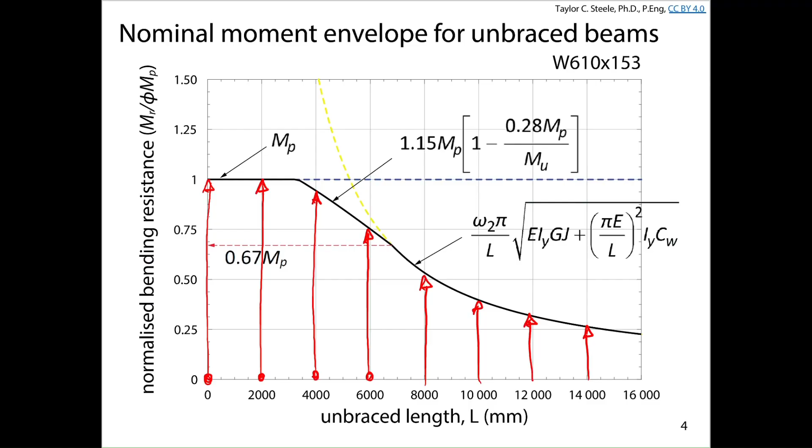When we're looking at our girders and they're unbraced, it depends on what the unbraced length is. Sometimes the unbraced length is still short enough that we get the full plastic section resistance. But if it's sufficiently long, we need to worry about inelastic lateral torsional buckling. For really long unbraced lengths, we consider elastic lateral torsional buckling strength. So just like for columns, the handbook gives us a series of tables showing the moment resistance for different unbraced segment lengths. If you know the unbraced segment length, you can look it up in the handbook, calculated in a similar manner to this plot, to figure out if that beam will work for the unbraced segment length you have.

We also looked at shear, and while this is a similar plot in terms of shear resistance, we've got plastification of stocky webs, inelastic buckling of intermediate webs, and elastic buckling of slender webs.

The nice thing for shear is that it doesn't matter how long the beam is. It doesn't matter anything about the beam other than what the cross-section is, because H over W is always going to be the same for a given cross-section. So we don't care how long the beam is, we just need to care what the section is and what H over W is.

95% of the time, or really 100% of the time, we're in this range - all of our W sections fall within an H over W ratio of 60 or less. Most of the time that means we'll get 0.66 FY. Sometimes we have some inelastic buckling, and the handbook figures that out for you. It says, for this H to W ratio for this cross-section, this is the shear resistance, and gives you that in the table as well. That's never going to change.

You're going to see in the tables in a minute there's a Vmax and a Vmin. We don't care about Vmin in this course. For simple framing like this, Vmax is all we care about, and that's basically going to be equal to phi AW Fs based on the H over W ratio for that particular section.

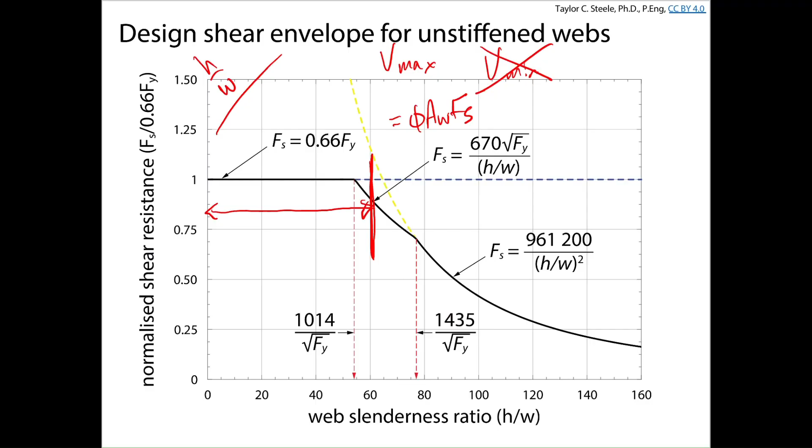Finally, we looked at calculating deflection. We looked at superposition in terms of applying it to a series of point loads, where we have an equation for a single point load at the middle of a beam, and an equation for a couple of point loads equally spaced from the supports, and we could come up with an equation to calculate displacement. This is great if we know what section we have and we know what I is. The problem is we actually need to figure out what I we need in order to satisfy deflection.

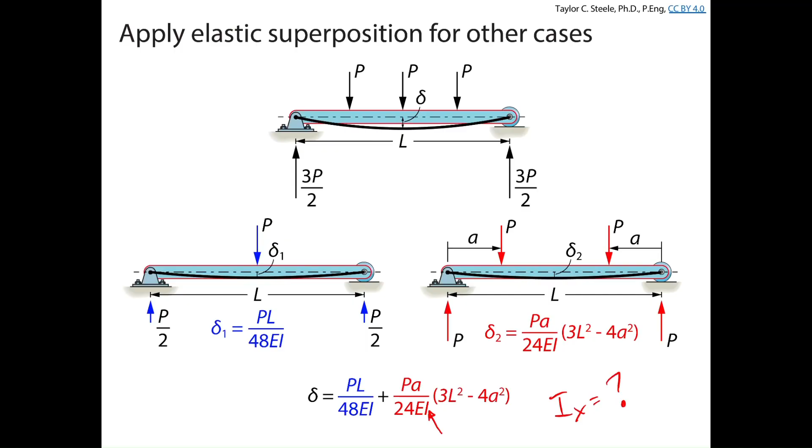So we're basically going to figure out what's the moment demand on our beam, what's the shear demand on our beam, and based on this equation, we're going to figure out what the limit on delta is, and use that to back calculate a value of I. I'll show you how the tables are helpful for selecting a section that's the most efficient for the loading present on the beams we're trying to design.

After today, you should be able to identify which shapes make the most effective flexural members, specifically for joists and girders, navigate the beam selection tables in the CISC handbook, and select the least weight section that satisfies the ultimate shear and bending and serviceability deflection limit states for joists and girders. Does anyone have questions about why those three things are important before we get into this today?

So I've shown you this slide a million times. Well, a slight exaggeration.

Wide flange sections are great for beams. They're easy to connect because we can fit a shear connection in the web, connecting it to the face of a column or the web of a girder. We have a section about 200 millimeters deep with 46 kilograms per meter of steel. Another one, more than twice as tall, with the same amount of steel in the cross-section. So they have the same cross-sectional weight and area, but they're rolled differently, giving two different sections. Does everyone remember which of these two were better for columns?

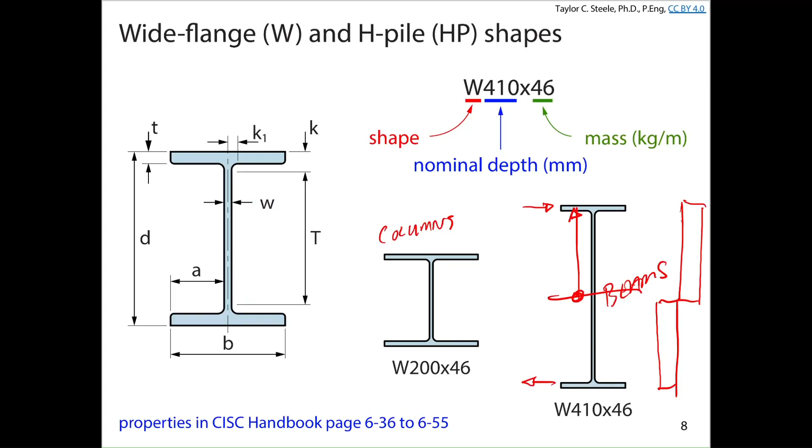Exactly. So remember, the lateral torsional buckling strength, MU, the elastic lateral torsional buckling strength, is very dependent on IY. There's no IX in this equation at all—it just has to do with warping, twisting, and the weak axis moment of inertia.

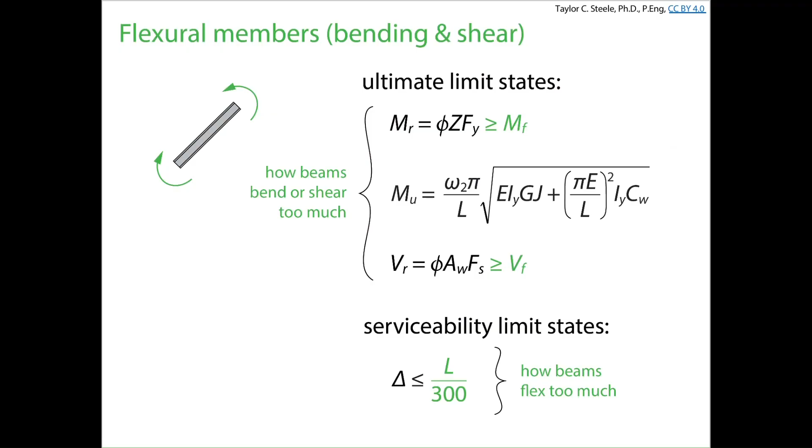If I plot those two curves—the same curve I showed before, just for two different sections—we've got the cross-sectional strength in the plateau region, the inelastic lateral torsional buckling strength, and the elastic lateral torsional buckling strength for these two beams. What we can see is, for well-braced beams, the moment resistance of the W410 by 46 is almost double, because it's really deep, Z is really big, so the moment resistance is bigger.

However, if we look at the unbraced length, that starts to cause inelastic lateral torsional buckling problems. As soon as the bracing between joists exceeds about 1.79 meters—called LU, tabulated in the handbook—we drastically reduce the strength of that beam. At a certain point, it actually becomes weaker than the W200 by 46 because the unbraced length is so long. A little counterintuitive, but these shorter, wider beams are more stable against lateral torsional buckling and can have much longer lengths between points of lateral restraint.

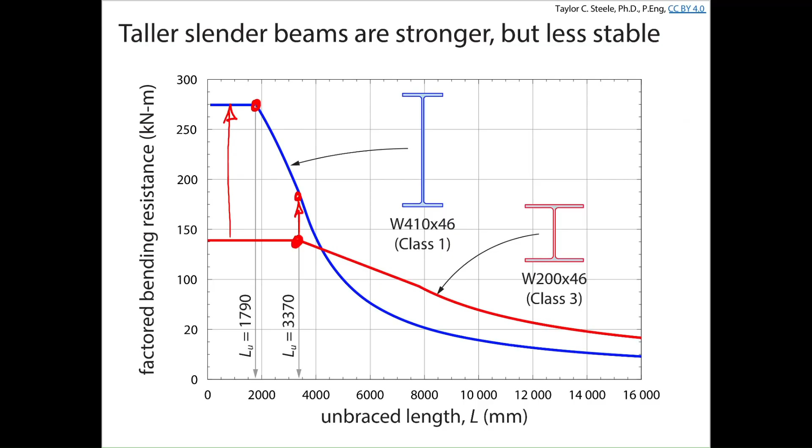Okay, so again, we tend to be playing in the short unbraced length section, and so we're going to be focusing on the deeper beams anyway. Oops, skipped a little bit.

In the handbook, in the blue pages, the first set of blue watermark pages, you're going to see tables that look something like this. On page 5-22 is what this page is here.

What it's doing is tabulating for a bunch of different sections, and the order is kind of weird. It's going to tell you what the shear resistance is, and again, we're going to focus on this left-hand column. This right-hand column we're not talking about in this class because it's not important for us. We only care about shear max, VR max.

It also tells us IX. That's pretty helpful because if we back-calculate a moment of inertia we need to get a displacement that works for us, then we can figure out what section works.

And then it tells us MR for values of the unbraced segment length that are less than the length where we start to develop some inelastic lateral torsional buckling. So LU here is tabulated for us — that's the unbraced length beyond which we start to get lateral torsional buckling, reducing the moment resistance.

This section shows us the moment resistance considering the unbraced segment and how lateral torsional buckling might reduce that strength. We don't see any entries in the 2000 column because 2000 is shorter, and so for this we still get the full cross-sectional resistance.

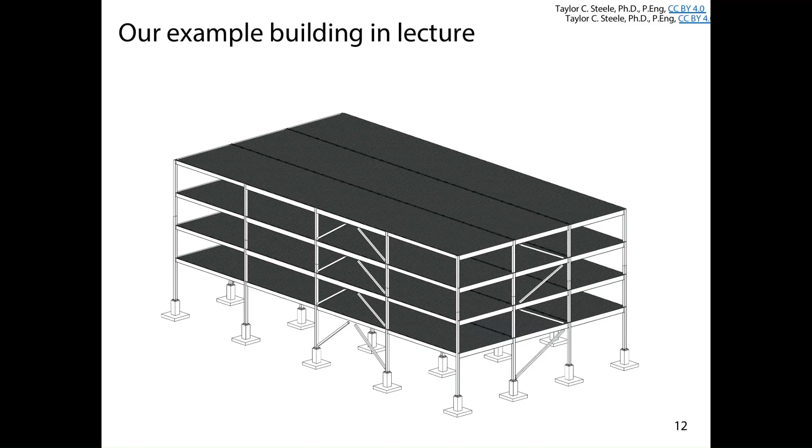This is the example building, right? We've got this 4-story building. We've looked at the bracing. We've looked at the columns. We still have to look at the joists and girders. So today we're going to focus on some of the joists and girders.

All of the joists, pretty much, except for the ones on the perimeter, are going to be the same as the one listed here in blue. So if we pick this joist, that works for pretty much all the joists in the floor plan. This girder here is pretty much the same as every girder except for the girders on the east and west walls. So whatever we pick for this girder is pretty much going to work for all the other girders. We're just going to focus on these typical ones.

We're going to focus on the joist first, and then we'll focus on the girder. What we want to do is pick the sections for the joist and girder that will be safe and efficient. The dead load was 4.8 on this floor, and the live load was 2.4. That was from lecture 5.

I went through, and we don't need to go through the tributary width and shear moment calculations anymore. I trust you can do that step. We did a tributary width calculation last day to get the deflection. These are the shear and bending moment diagrams for the floor joist for dead and live loads. We've got 23.6 kilonewtons, 47.3 for live and dead load shear respectively, and 62 and 124 for the moment for live and dead loads respectively.

And the tributary area was less than 20, right? Because tributary area was equal to 1.875 meters, which was the tributary width times the length of the joist, which was 10.5. That gives us 19.7. It's less than 20, so we have no reduction that we can apply to the joist.

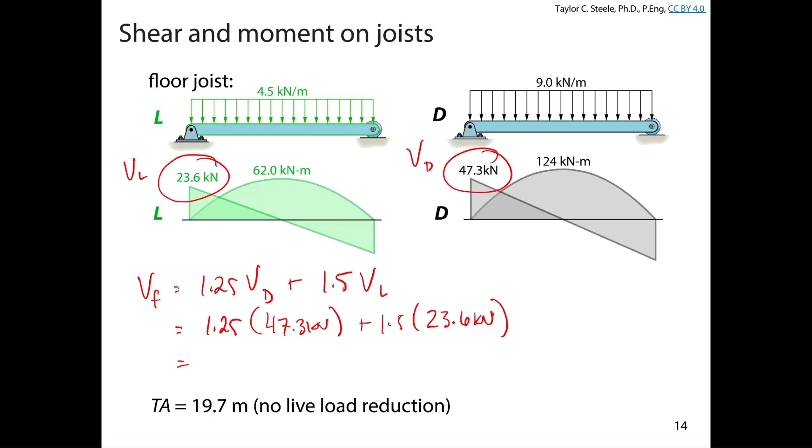So if we do this, we get 1.25 times - whoops, sorry, not 23.6, I should have oriented these the other way so I wouldn't confuse myself like that - 47.3 kilonewtons plus 1.5 times 23.6 kilonewtons. And we get, for a factored shear, I end up getting anyway, and someone should check this for me to be sure, 95 kilonewtons of factored shear acting on that joist.

Okay, so dead and live loads, no other loads are present. You can do whatever load combination you want. You can go ahead and do 1.4W plus 1.25 dead plus 0.5 live. You're never going to get anything that governs compared to the 1.25 dead plus 1.5 live. For joists that are inside, it's always 1.25 dead plus 1.5 live. You can trust me for that. You don't need to plug through the 20 other load combinations to figure out what the maximum factored shear force is. I really hope I'm done being sick soon. Any questions about that before we continue on?

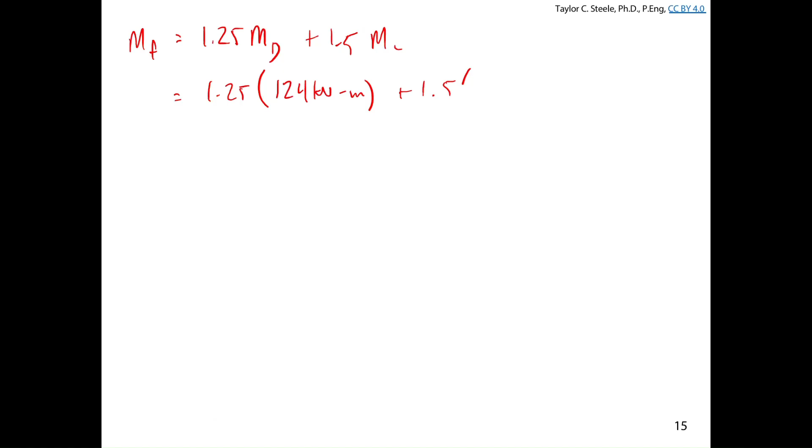We also need MF, that's 1.25 times the dead load moment plus 1.5 times the live load moment. So 1.25 times 124 kilonewton meters for dead plus 1.5 times 62 kilonewton meters for live load. When I do that factoring, I end up with 248 kilonewton meters of factored load.

Any questions about that factored moment calculation before we continue on? Okay.

Now we have delta, right? We come back to this slide and we would calculate delta if we knew Ix as 5WL to the 4th over 384EI. The question is what goes into W? Or specifically, how do we factor the dead load and live load displacements?

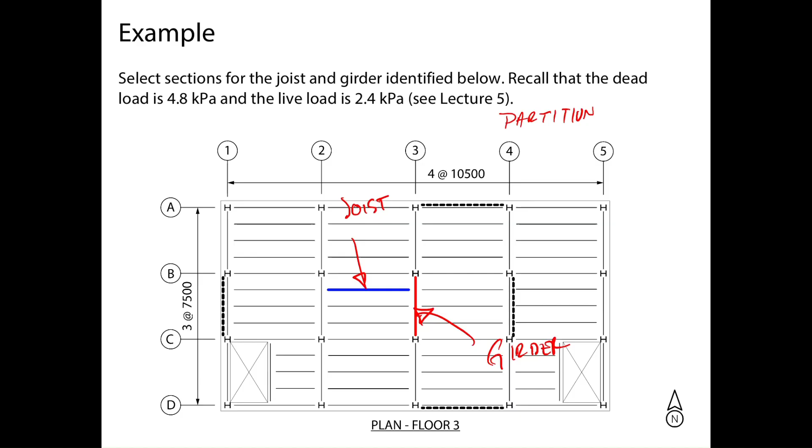In our case, we're going to assume that the partitions are permanent fixtures. What does that mean for our deflection calculations? It means none of the dead load goes into our deflection calculations. If they're permanent, they get installed and fastened before the floor goes down. We only really care about the deflection that happens after the flooring is installed. And if the partitions are permanent, then we're going to have only live load to consider in our calculations.

Okay, so basically we can base our required moment of inertia off of the live load displacement only in this case.

And let's also assume, what did I assume here? Let's assume that the flooring is susceptible to cracking. What does that mean for my deflection calculations?

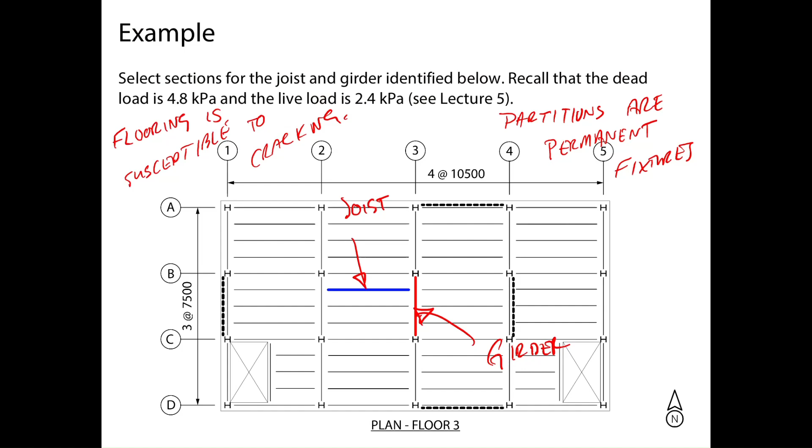It's the number, right? Whatever number I'm going to be limiting L over, that's my maximum displacement. That's going to be telling me that when I do this calculation, this number here is going to be 360. Okay, so we've got enough information.

The Ix minimum that's required is equal to number over L times 5WL to the fourth based off live load over 384E. That's going to be 360 divided by 10,500 millimeters squared, that's the length of our joist, times 5.

Our live load, distributed load, is drawn on the floor joist here. So we had 2.4 kPa times the 1.875 meter tributary width. That gives us a live load of 4.5 kilonewtons per meter. Converting that to newtons and millimeters, we remember that a kilonewton per meter is equal to a newton per millimeter.

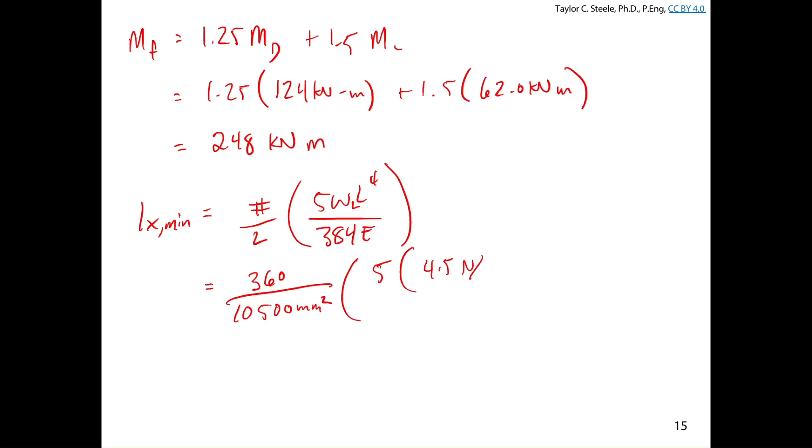And so we can write 4.5 newtons per millimeter in the equation. We have 10,500 millimeters to the fourth, and I'm not sure why I squared that, it's not millimeters squared over there. Divided by 384 times 200 times 10 to the 3 megapascals.

So we could also say, okay, well, the length gets cancelled out and really we just get L cubed there. That would be helpful as well.

But we'll remember when we're putting this in our calculator, what are we expecting to get as a unit when we have newtons and millimeters? We're going to get what for the moment of inertia? Millimeters to the 4th. And we'll remember it's helpful because our table is always going to be presenting moment of inertia in 10 to the 6 millimeters to the fourth.

When you calculate this, you want to write it as 10 to the 6 millimeters to the fourth. Otherwise, you're going to have a hell of a time finding a value that works for you in the table. If you write it as 1.22 times 10 to the 8 millimeters to the fourth, which is what you're going to get in the calculator, then you're going to be confused when you come look at this table, which is in the hundreds of 10 to the 6 millimeters to the fourth.

Okay, so if you were to write this out in your calculator, you would get 1.22 times 10 to the 8 millimeters to the fourth, right? That's what you'd get in the calculator. You want to move the decimal to the right 2 times and write it as 122 times 10 to the 6 millimeters to the fourth.

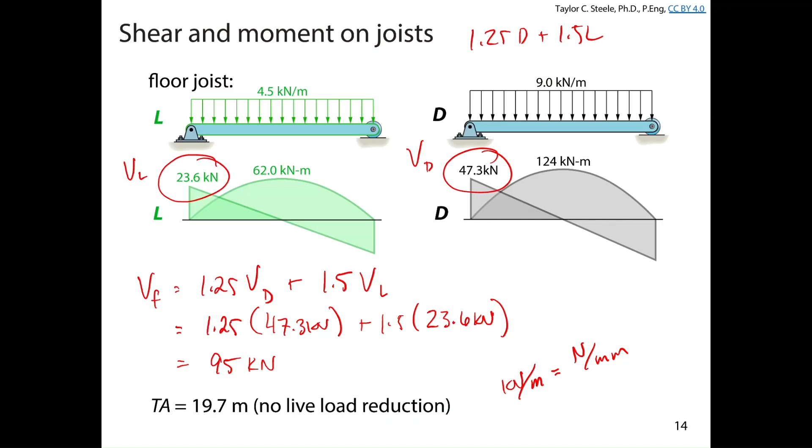Okay, so what did we do here? We have the factored shear on the beam, the factored moment on the beam, and the minimum moment of inertia that would allow us to satisfy deflection limit states. So what do we do with these numbers?

We just need to look in the section of the handbook with the selection tables, and we need to find a beam that has a moment resistance at least equal to MF, a shear resistance at least equal to VF, and a moment of inertia at least equal to the minimum required to satisfy deflection. Okay, so I'll do my best here, again on camera.

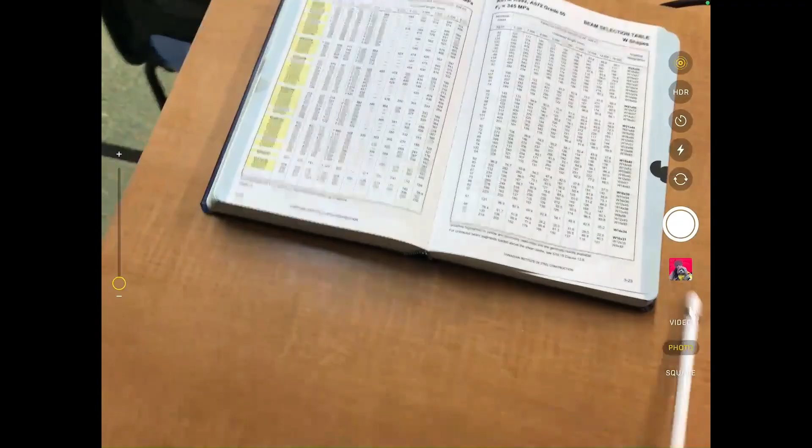Let me rewrite these on the board to remind you. VF is 95 kilonewtons, and sorry for people watching the video later, I'm just writing stuff on the board. MF was 248 kilonewton meters, and IX min was 122 times 10 to the 6 millimeters to the fourth. So I'm looking for 122, 248, and 95 in those tables.

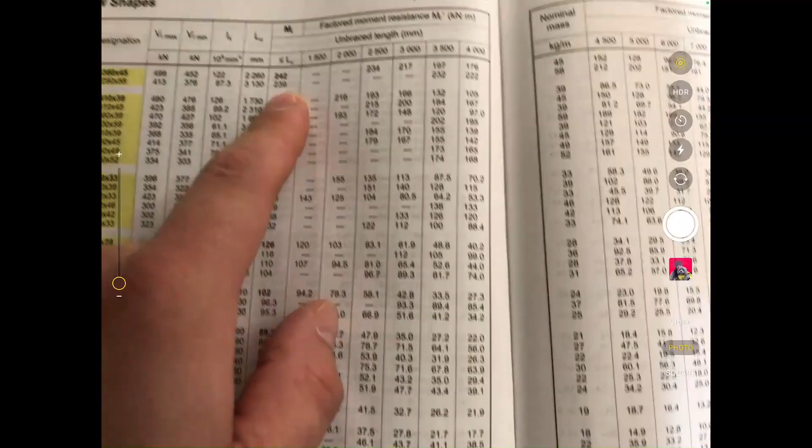So if you start in the handbook and go to the start of the tables, the table on page 5-24, we're going to start looking first for a moment that's going to work. And we're going to see none of these moments actually work, right? The biggest moment on this table is 242, and that's not quite going to work for us.

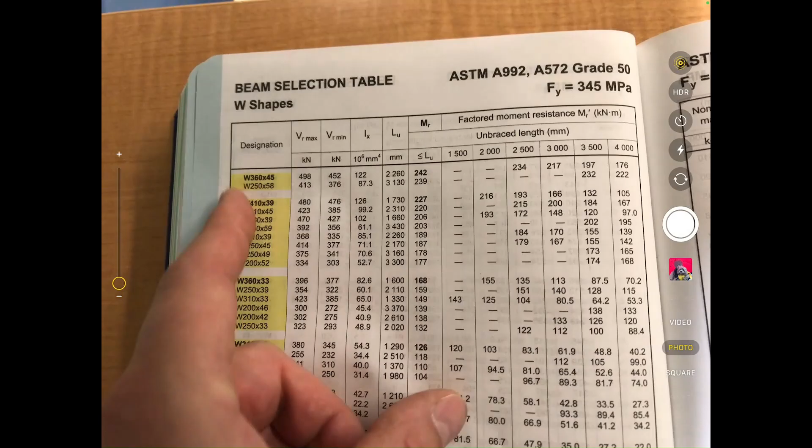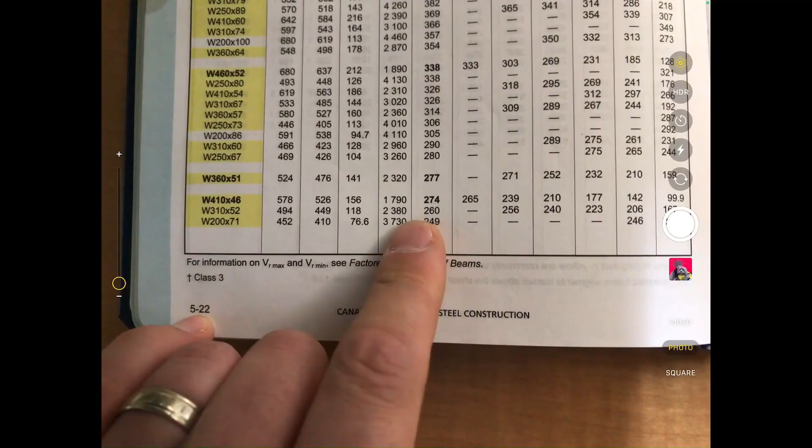So maybe a W360 by 45 was close. We're going to turn the page at the bottom, and as soon as we look at the bottom, page 5-22, we're going to see that a W410 by 46 has a moment resistance that works. And remember, any of these would work here.

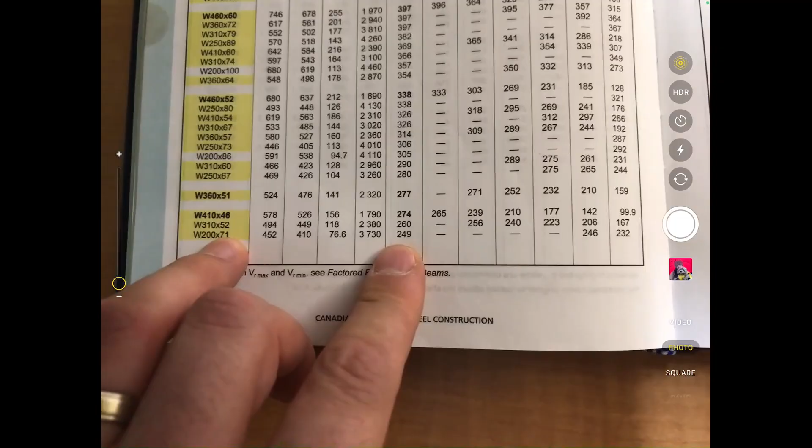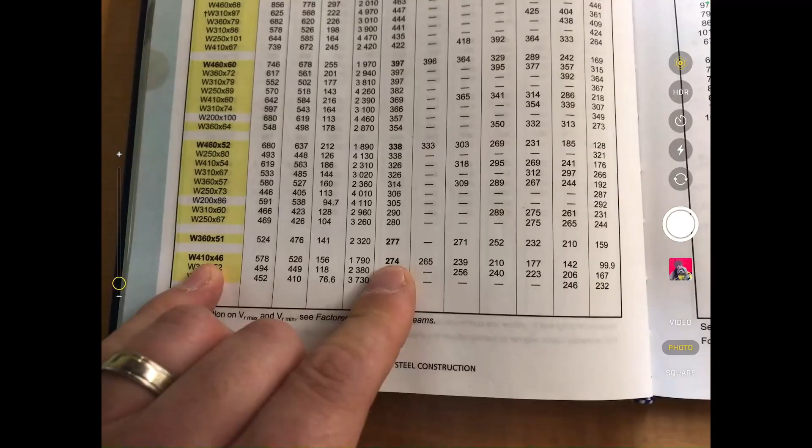A W200 by 71 is actually less in moment resistance, but it's heavier - 71 compared to 46, that's like 60% more section. A 310 by 52 could also work, but it's heavier. So a W410 by 46 is the most efficient that will provide the moment resistance that's required.

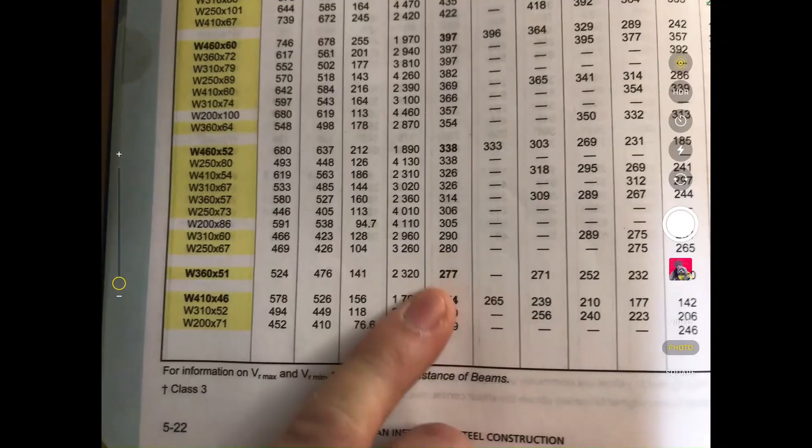And if we look at VR max, it's 578. Is that enough? That's way more than we need. We need 95 kilonewtons of shear. It's the moment that's going to be governing the strength of these joists, so we don't really care about the shear, it's plenty.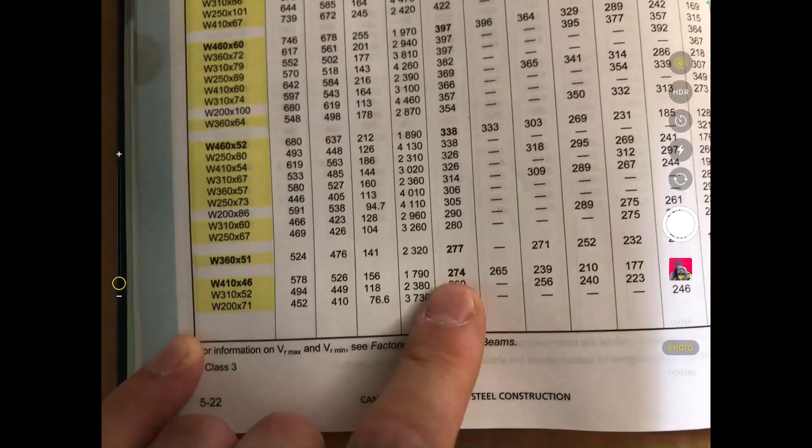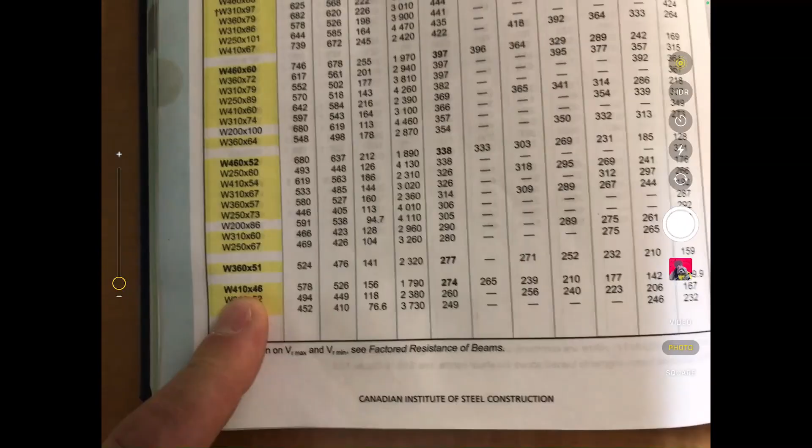And then the last thing we're going to look at is IX. IX for this section is 156. We needed 122. Is this section acceptable? Yeah. So we're picking it based on moment - it works for us here. We've got enough I, we've got enough V, and so we're going to pick a W410 by 46 to be the joist in our example building.

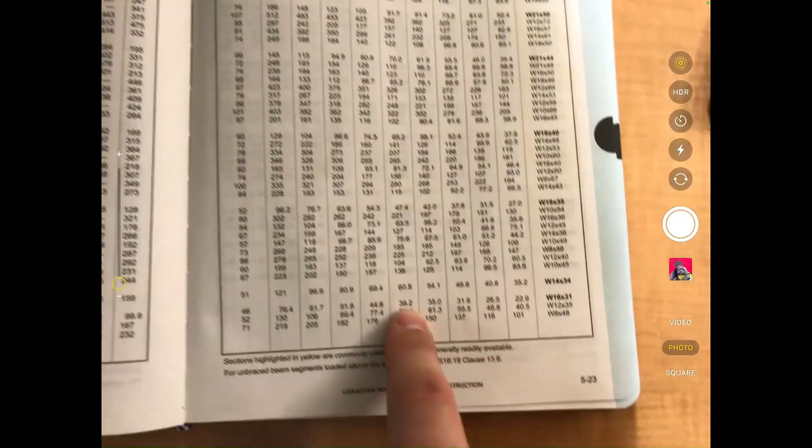Okay, why did I not look at any of these values of moment when looking at my joist? I went straight to the fully laterally braced bending moment resistance. Why do I not care about any of these? My joist is 10 meters long. Should I not be looking way out here at like 32 kilonewton meters of strength? Why am I looking at this column here, fully laterally braced?

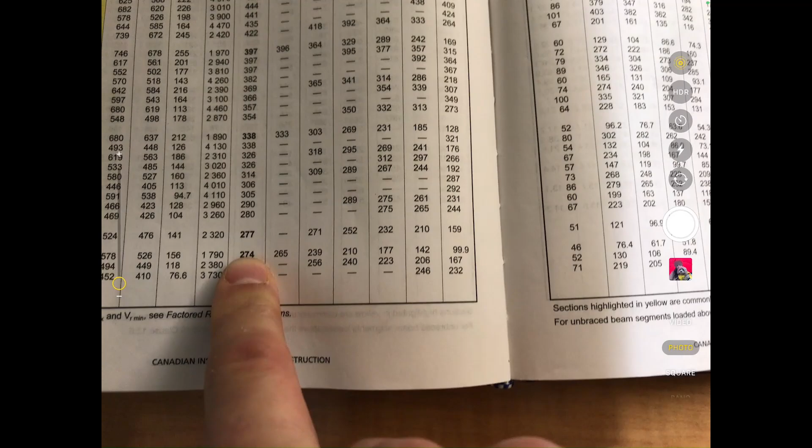Yeah, because it's a joist, and joists are fully laterally braced. That's how we build buildings. It's connected to the steel deck. It's a fully laterally braced beam, and so we base the strength on the fully laterally braced moment resistance.

Okay, so we're going to pick W410 by 46, and that's going to work for most of the joists on the floor. Any questions about that example joist selection before I move to the girder?

Okay, so let's look at the girder then. We looked at this for shear, right? We looked at the shear resistance of a W, I forget what it was, not important, but we looked at the factor.

The tributary area for this girder is 59.1, and so whatever we calculated for live load, we can reduce those live load effects by 30%. So we multiply them by 0.707.

And so this is - oops, why am I writing like that - this is VL star, the reduced factored shear, or the reduced - Jesus, that's not right at all. That is reduced live load shear, there we go. And that's the reduced live load moment.

Okay, so again, when we're looking at the factored forces, there's nothing other than dead and live load acting on this particular component. And so we're going to look at the factored shear force. That's going to be 1.25 times our dead load shear plus 1.5 times the reduced shear force. That's 1.25 times 142 plus 1.5 times 50.1.

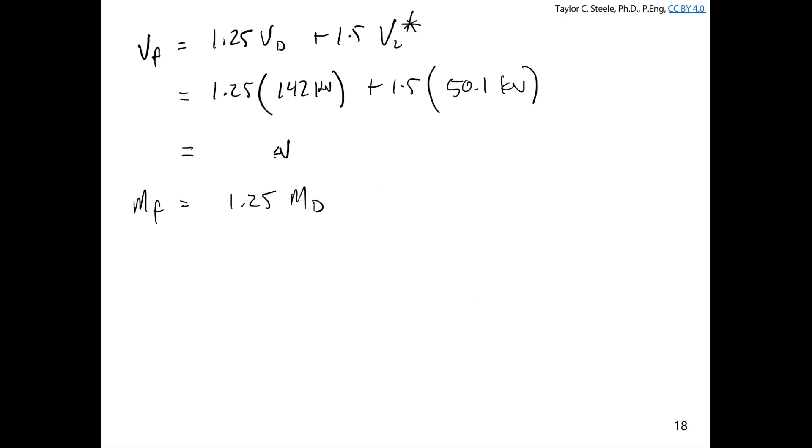We also need MF, 1.25 times... something different, Katie? What did you get? 253. Why do I have that as a shear force? Sorry, you're right, I had the wrong calculation there. Thank you for catching that. So when I did the calculation, for some reason, the old joist live load in there should be 253. Cool? Katie, it's the same number?

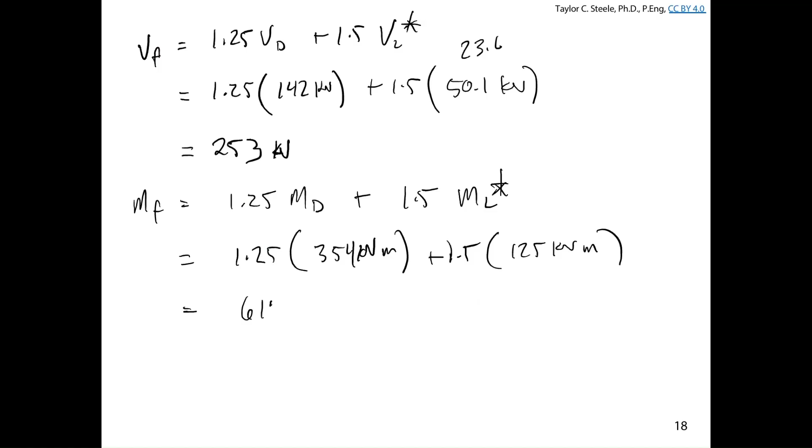So the factored moment, we have M live star. I should be sure that I'm using moment there. I am. So you get 1.25 times the dead load moment, which was 354, plus 1.5 times the live load reduced moment, 125. I get MF is equal to 619 kilonewton meters.

Okay. Questions about those factored load calculations before we continue on?

Okay, the hardest part here is the deflections. Again, we're just going to focus on the live load deflections. There's no dead load here that we're considering, and there are no permanent partitions, so we're not going to include that. We're basically saying, well, the delta dead that occurs after the floors... and

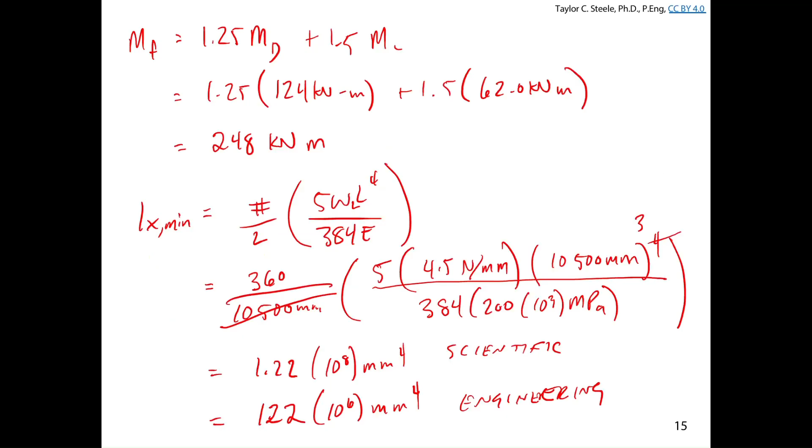Sorry, you have a question? Oh no, what did I do? I have 125 kilonewton meters. I have 300 and, oh, I wrote 345, like a moron. Okay. Oh boy, if I do 54 instead of 45... I never thought I was dyslexic, but sometimes I wonder if I might be a little bit. 630 kilonewton meters, is that the same number? Great, thank you. So these are the correct values, 253 of shear and 630 of bending moment.

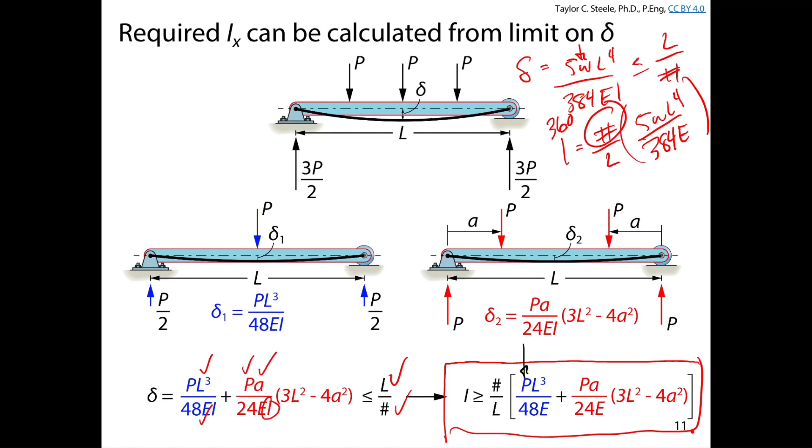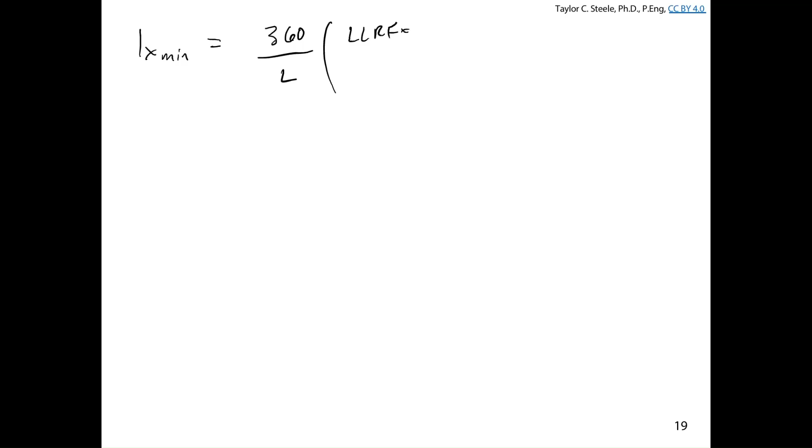So the minimum moment of inertia that we need our beam to have is going to be 360, maybe I'll write out the equation again, over L, multiplied by... and we'll remember here as well, this is P that we're using from the loads applied to the girder, but because we have a live load reduction factor that we can apply when we're calculating deflection, we're going to include that as well on our calculation. So we're going to include the live load reduction factor on the live load point load that we're including in our deflection calculation, times A over 24E, times 3 times the length squared minus 4A squared, plus live load reduction factor times PL times L cubed over 48E.

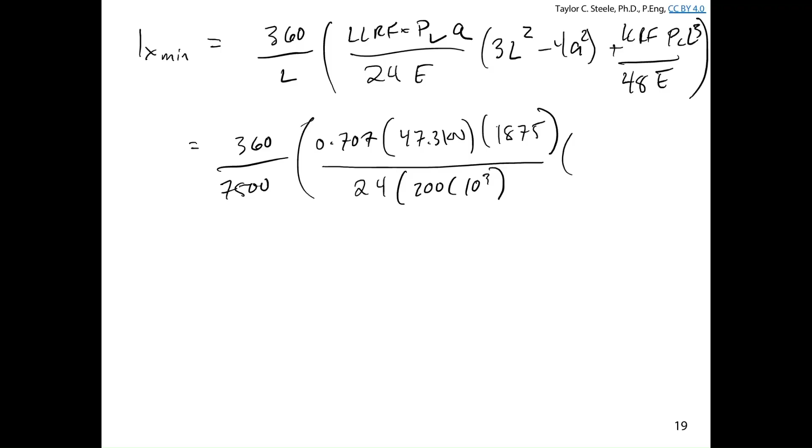And if I do that, I'm going to plug in the values: 360 over... times 0.707 times 47.3, which is the live load point load on the girder, times A, which is 1875, 24 times 200 times 10 to the 3, multiplied by 3 times 7,500 squared, minus 4 times 1875 squared, plus 0.707 times 47 kilonewtons times 7,500 cubed over 48 times 200 times 10 to the 3.

So the most involved calculation in terms of writing out all the stuff in the calculator, but when I do that I get 191, again arranged such that I get 10 to the 6 millimeters to the 4th. And I'm pretty confident in that, I caught a mistake just before I wrote that out, so that should be the right value. You don't need to go through and check that in your calculator. We'll be here until 9:30 if that's the case.

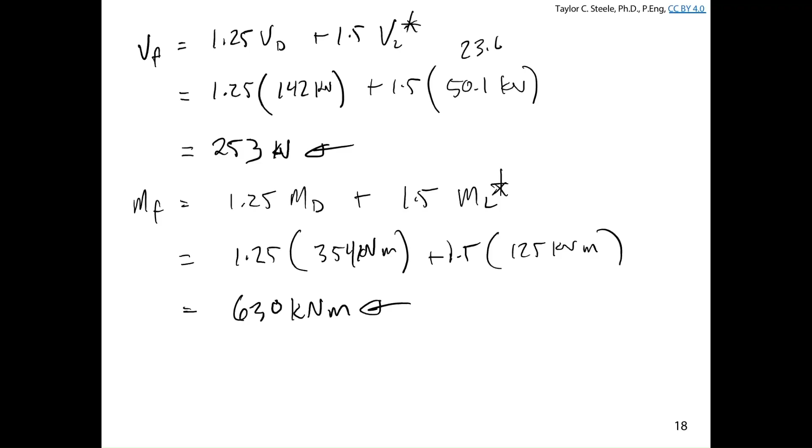So we have a factored shear force of 253. We need our beam to have a factored shear resistance bigger than that. We have a factored moment of 630 kilonewton meters, and we need our beam to have a factored moment bigger than that. And we calculate the minimum moment of inertia required: it's 191 times 10 to the 6 millimeters to the 4th. We need a girder section to have a moment of inertia higher than that.

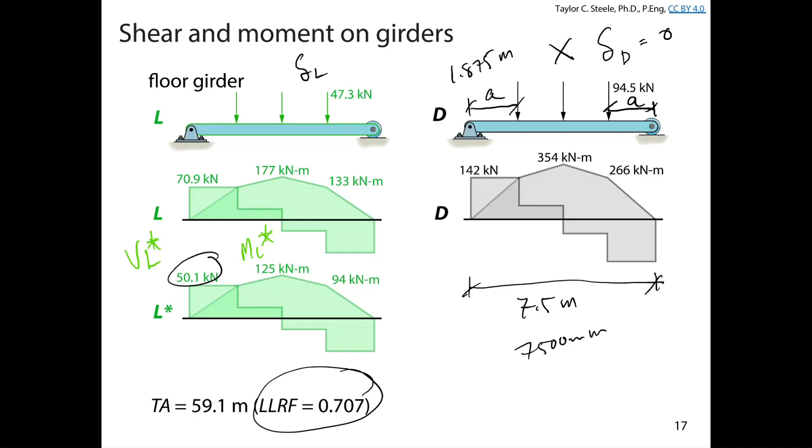The first thing we need to consider: our girder is laterally unbraced, or rather braced at intermediate points. The girder is braced at the joist, so L, when calculating MU, the unbraced segment length, is equal to 1875 millimeters.

The first thing we should do is look at MR, because that's what we always do, at the right MR. In our case, we don't have an unbraced length that exceeds LU 2500, so I'd look at this column and see which one has the moment resistance that works. Here, LU is 2650, 5000, and so on - there's not a single LU value in this column smaller than the unbraced segment length we have.

So if we look at this table, our unbraced segment length is shorter than LU for all of these sections, so I don't really care - maybe I'd go from 484 to 483 if it was in here somewhere. But torsional buckling is not going to reduce the moment resistance for our girder in this case. We can be safe looking at this first column, and we don't need to consider any other unbraced segment lengths - we're going to get phi MP or phi S.

If I look here, the efficient section W460 by 60 is not strong enough. 530 by 66 is not strong enough. 530 by 74 is not strong enough. But a W610 by 82 has a factored resistance of 683, which is bigger than 630 in bending.

All of these other sections - well, some of them might work. Everything down to a by 110 would work based on the bending moment resistance. If I really wanted a shorter girder, by 110, but it's 30% heavier than a 610 by 82, so I'm going to use less steel and provide more margin of safety with 683.

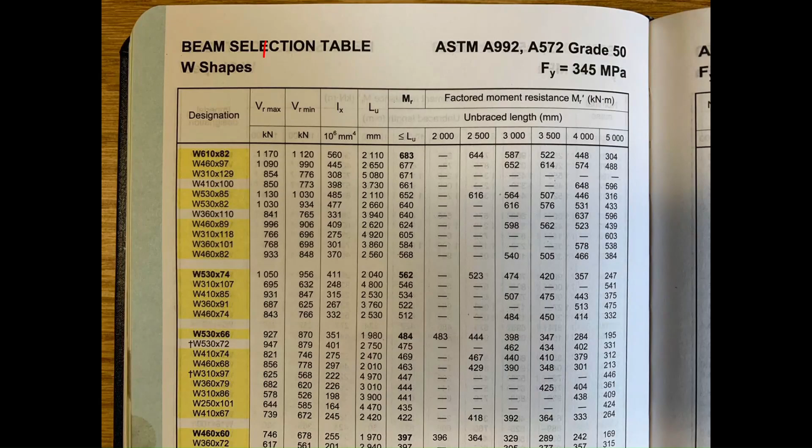Why is my pencil not working all of a sudden? So I'm going to pick this W610 by 82, and that's going to have a moment resistance that's bigger, a shear resistance that's bigger, and a moment of inertia that's bigger than required for me to satisfy all the things I need to.

Oh, because I'm an eraser - that would help if I was not an eraser, wouldn't it? So I'm going to pick a W610 by 82 because MR is bigger than MF, VR is bigger than VF, and IX is bigger than IX minimum to satisfy deflection limit states.

So we went through shear, moment, and IX calculations for our joist and our girder. We used the selection tables to pick sections that had MR, VR, and IX bigger than the values we calculated. Again, we picked the bold values because in this case we were interested in finding the most efficient section that would work, though there were other sections that might work, and you might pick those for other reasons.

Does anyone have any questions about anything we did for the joist or girder, how we pick beams, before we move to close lecture in the morning?

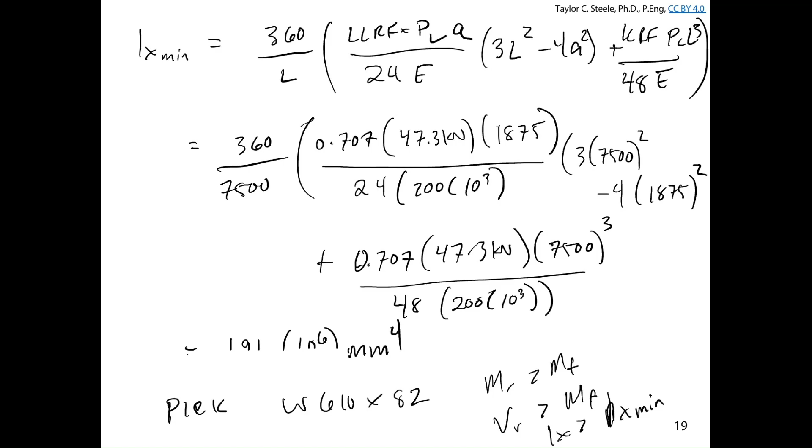Now you should be able to identify which shapes make effective flexural members - they're usually the deepest sections. Joists and girders should be able to navigate blue tables, the beam selection tables, figure out what they mean and where to find values, and ultimately use those tables to select the least weight section by ultimate and serviceability limit states, ultimate being shear and moment, serviceability being deflection.